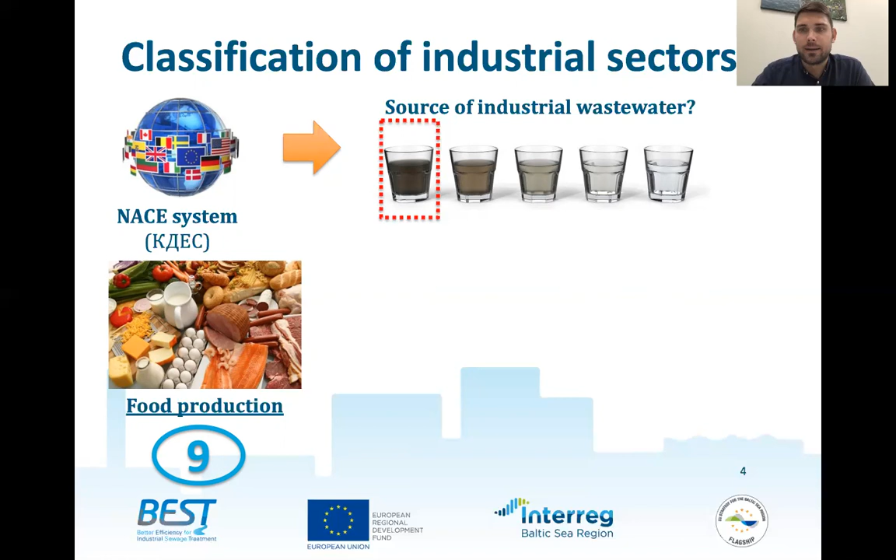Of these possible industrial sectors, we selected food production as one of the most urgent sectors that might pollute the public sewer systems. Within the food production sector, we even divided 9 subsectors for different kinds of food production, to assess the most urgent ones that should be in the scope of water utilities and environmental authorities. We also found 21 additional sectors that might pollute the public sewer systems.

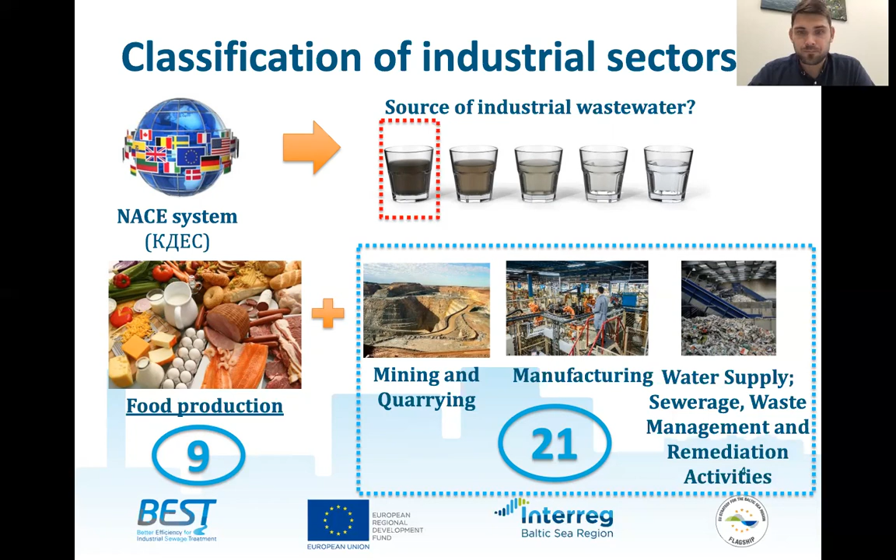Mostly they are connected to the manufacturing of various products like electrical components, vehicles, beverages, and so on. Mining and water supply, sewage, waste management and remediation activities can also pollute the public sewer systems, and it has been found that in some countries they actually do. So in total, 30 industrial sectors were in the scope of the research.

What we have found is that in all of the countries in our scope, where we did the studies on the industrial sectors, the meat production and milk processing or dairy product production sectors were mentioned as the most important and most possible pollutants to the public sewer systems. In all 6 countries, you see that they have been mentioned. Also, the production of beverages has been mentioned as one of the most important sectors in 4 countries.

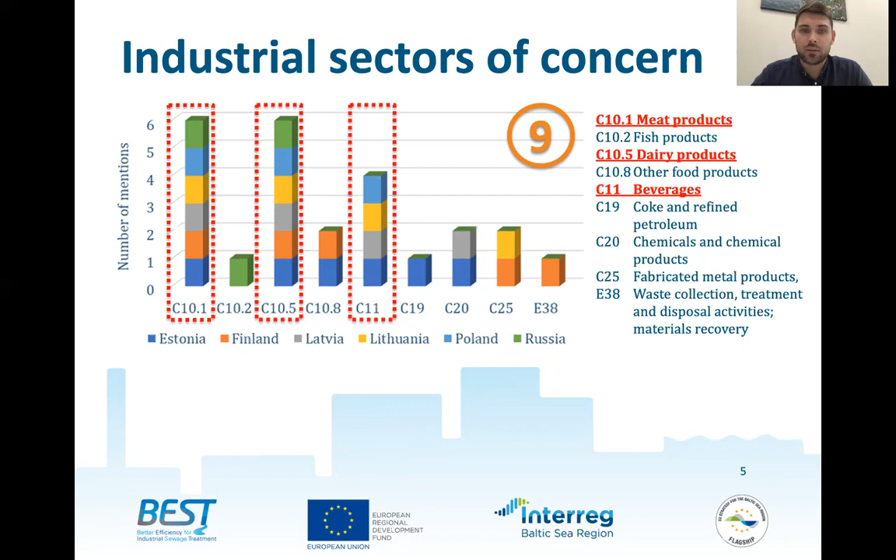In total, 9 sectors were mentioned in our research as possible pollution sources of the public sewer systems in case untreated or highly polluted industrial wastewater is discharged to those systems. And in total, in the Baltic Sea region, in those 6 countries, there were more than 3,000 industrial organizations registered in those industrial sectors, meaning that at least 3,000 point sources can be found in the countries that might be the sources of pollution and should be in the scope of the water utilities and also the environmental authorities.

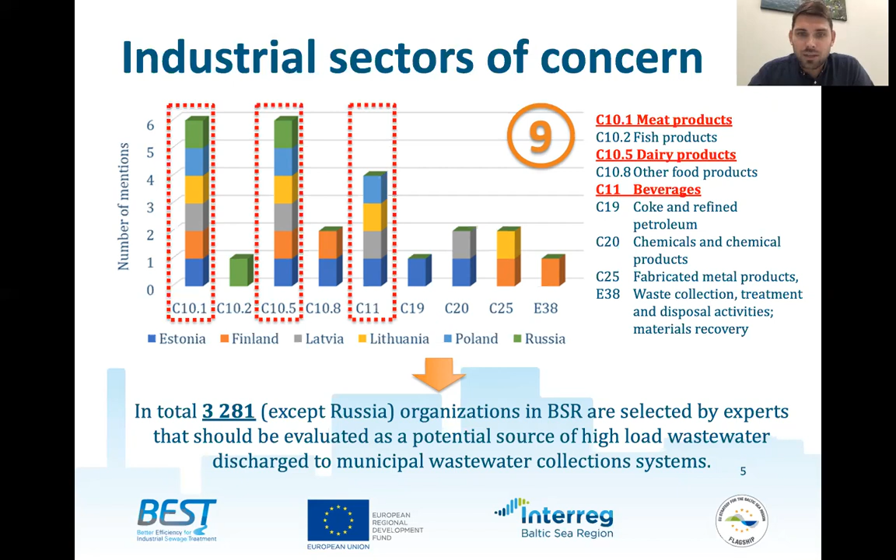It should be mentioned that those more than 3,000 organizations also include very small ones that have wastewater amounts less than 5 or 10 cubic meters per day. So the actual impact on the treatment plants or on the public sewer might be negligible, but still it might be a potential source of problems.

To analyze the sectors more carefully, we did interviews for those most urgent sectors. We did interviews with the water utilities where the wastewater is discharged, and also with the industrial organizations that discharge the wastewater to the public sewer. In total, we made 191 interviews in those 6 countries, and those interviews concerned 134 industrial organizations.

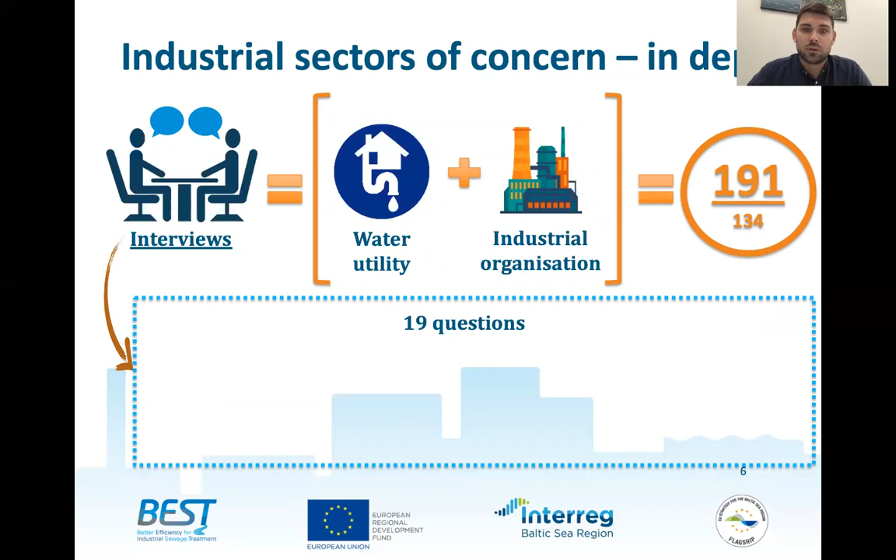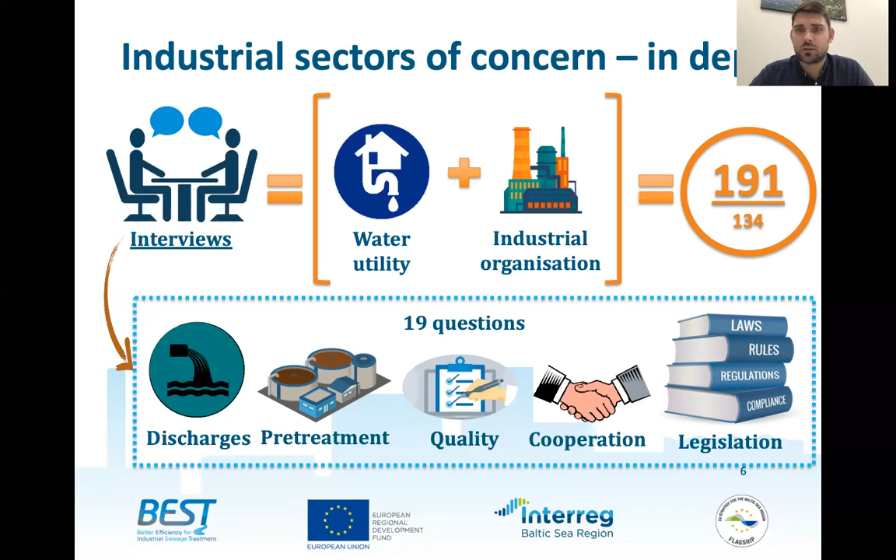We asked in total 19 questions in each interview regarding the discharge amount of the industrial wastewater, the existence or non-existence of pretreatment in the industrial organization, the quality of the industrial wastewater, the cooperation model between the industrial organization and the water utility, and also some local or specific legislative acts or rules that must be taken into account in this cooperation between water utility and industrial organization.

What we have found regarding the contracts between industrial organizations and water utilities on the discharge of industrial wastewater is that in quite a lot of cases the industrial wastewater is in the scope of the water utilities, and the overall percentage of companies in the sectors that have contracts with the water utilities on this discharge is rather high, with some exclusions. For example, in Latvia the percent is lower than 50, but if we take into account only the big industrial organizations with significant wastewater flows that might actually be sources of problems, the percent rises to 61.

Overall, if we take into account all industrial organizations registered in the problematic sectors that we interviewed, almost 60% of them have contracts with water utilities. And if we look only at the big industrial organizations, almost 70% of them have contracts with the water utilities. But still, some contracts are missing in each of the countries, so it might be studied more deeply why the contracts are missing.

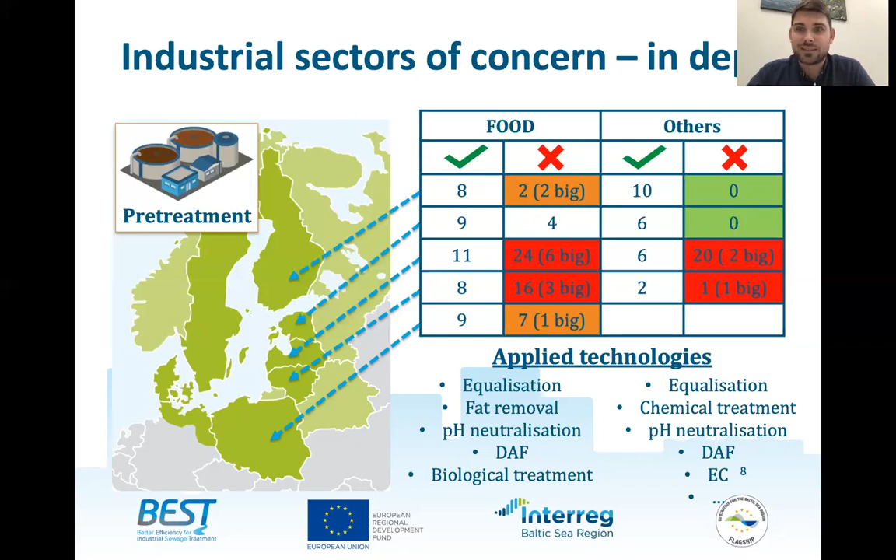The most popular applied technologies in the food sector are dissolved air flotation and fat removal. Sometimes there are also equalization tanks, pH neutralization and biological treatment, but that's not so often practiced. In other sectors, the most popular are also dissolved air flotation and some more specific technologies such as electrocoagulation or chemical treatment for specific chemical compounds at industries, which are case specific for the organization.

Regarding quality, we have found that in most of the countries the typical 7 parameters are set in the contracts. In the food sector, there are only some exceptions in Lithuania and Poland, where some extra parameters besides COD, BOD, suspended solids, pH, grease, and nitrogen and phosphorus are taken into account. Those are case-specific parameters for industrial organizations. So the biggest risks are in the scope of the water utilities.

Regarding the other sectors, there is a much higher possibility to find hazardous substances or priority substances or much more complex chemical pollution. The situation is rather good, because in most cases the typical 7 parameters are analyzed and set in the contracts, and extra case-specific lists are set in most contracts, except in Latvia.

We haven't found any contract where additional parameters are set for those industrial organizations that might have some very specific wastewater discharge to the public sewer. So this is one quite urgent situation that we have found so far.

And in total, it was found that there are 33 additional parameters listed in the contracts, different ones, and only 6 from 42 priority substances are mentioned in the contract. So meaning that quite a lot of substances are still not in the scope, but maybe they should not be in the scope because they cannot appear in the industrial organizations.

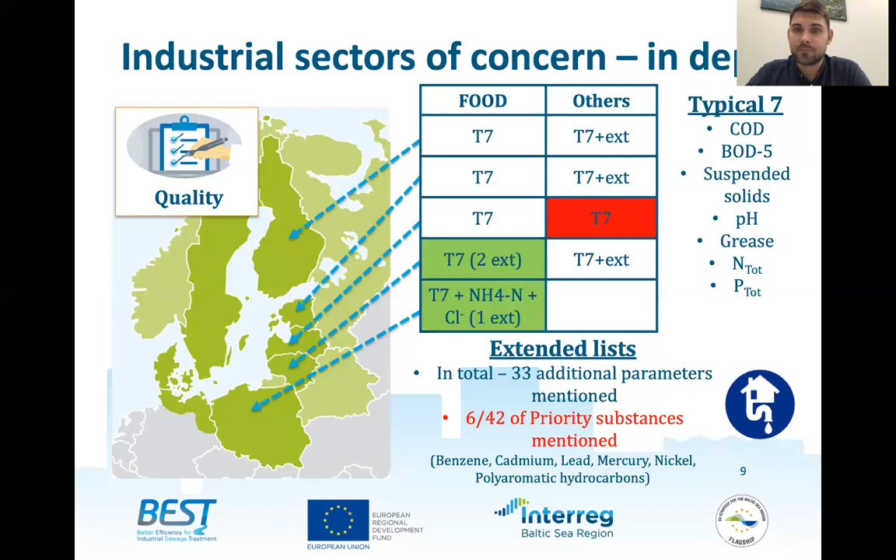And in most of the cases, the responsible organizations for the discharges to the sea are water utilities, so they are in the fining scope if something goes wrong. And regarding legislation, it was found that the legislation is in force already for 20 years. It has been adopted from the beginning of the year 2000, and the last countries adopted the legislation in 2017. The legislation is very country specific.

That is not so bad, but if it's municipality specific, it might be worse because it might be much more affected by politicians and local ideas on industrial wastewater treatment. Basically, in all of the cases, the water utility needs to have a contract with the industrial organization, and in the contract, the quality, the discharge amount, and the possible fining and additional tariff system are mentioned. So it should be quite clear in all of the cases. Also, there are some exceptions found.

And the conclusion that we have found in this research was that there is limited knowledge on the industrial wastewater impact on the municipal treatment plant on both sides of the pipe, the industry and also the water utility. The water utilities are not aware that they can actually use the industrial wastewater as a possibility to treat its wastewater more efficiently at the municipal treatment plant. And there are quite a lot of cases where they are not aware how to set the limitations. They set only the default limitations for the various compounds.

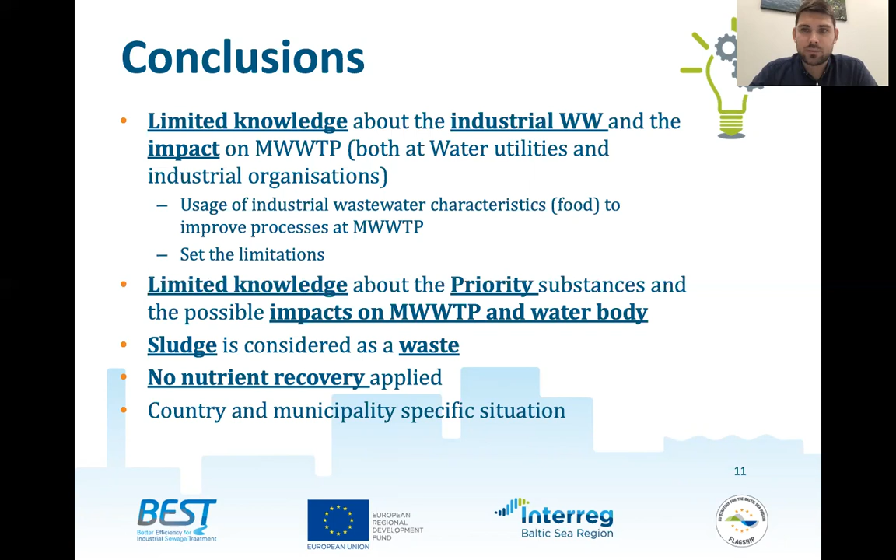It has been found that there's limited knowledge on the priority substances and the possible impacts on the treatment plants and the water bodies in all of the sites that we have interviewed. The sludge mostly is considered as waste; especially in industrial organizations, the sludge mostly is taken to biogas production plants, and they don't actually care what happens with it afterwards. And nutrient recovery was found only in 1 of 134 industrial organizations we have interviewed, and the situation is very country and municipality specific.

The challenges that we are facing or will be facing in the years ahead is that the legislation in theory is in place. However, the politicians often don't have the will to implement it in all of the countries, and in one way or another they impact how the local or national authorities interpret the legislation. In most of the cases, the only one responsible for discharge to the water bodies is the water utility, which is not the best practice, and it should be changed.

The environmental authorities should be strengthened in all of the countries, especially in the Baltic states. The integrated permitting system should be analyzed and changed in the Baltic states, especially so that the water utility is also involved in permitting, and not only the environmental authorities. The legislation on integrated permits on wastewater discharge in Finland, Sweden, Denmark, and Germany ensures that water utilities have a partner. We should also discuss this in the Baltic countries, that we are partners, not two different sides and enemies.

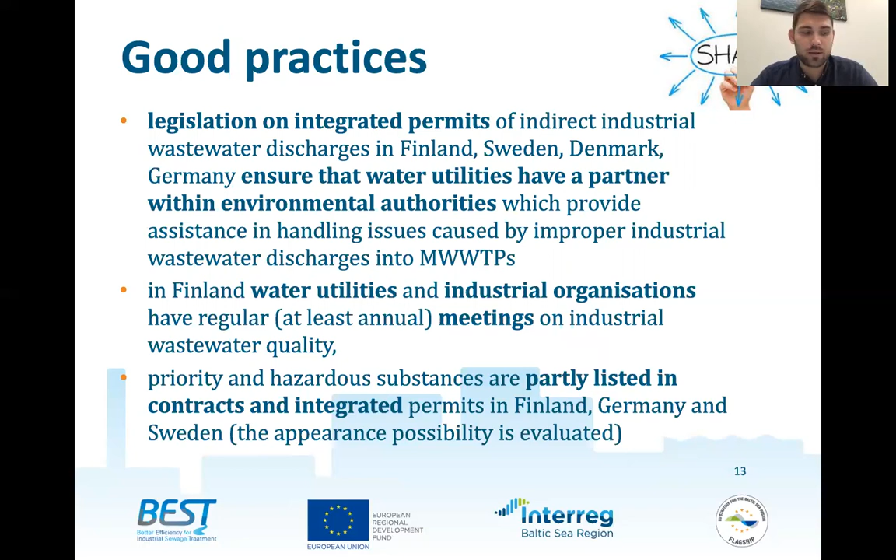In Finland, water utilities and industrial organizations have regular meetings on industrial waste discharge, and the priority and hazardous substances are partly listed in the permits and contracts, mostly in Finland, Germany, and Sweden. And actually, the appearance or possibility of appearance is evaluated. In the Baltic countries, it is not so clear, but it might be taken into account. Introduction of new regulations and fining systems in Latvia showed that the fines work quite well, and a lot of pre-treatment plants have been installed.

After our interviews, a couple of industrial organizations reorganized their production lines and are actually making new products. For example, they are collecting blood and making some products from that. And the public and private cooperation on industrial and municipal wastewater treatment or pre-treatment works quite well in Finland, Sweden, and Germany. However, on the eastern side of the Baltic Sea, it doesn't work so efficiently.

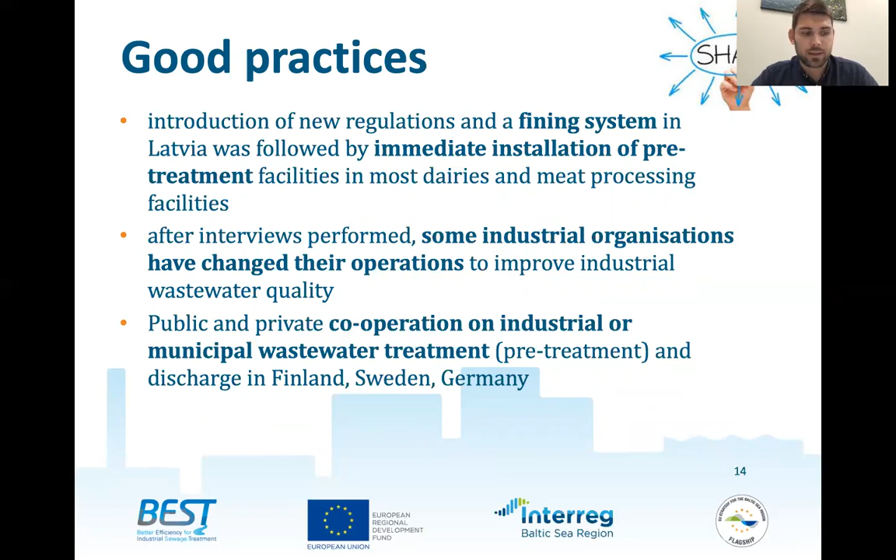And I hope that this has been one step closer to the green Baltic Sea, meaning that we will not see the sea green because of the algae, but because we have treated the wastewater properly and it is green and clean.